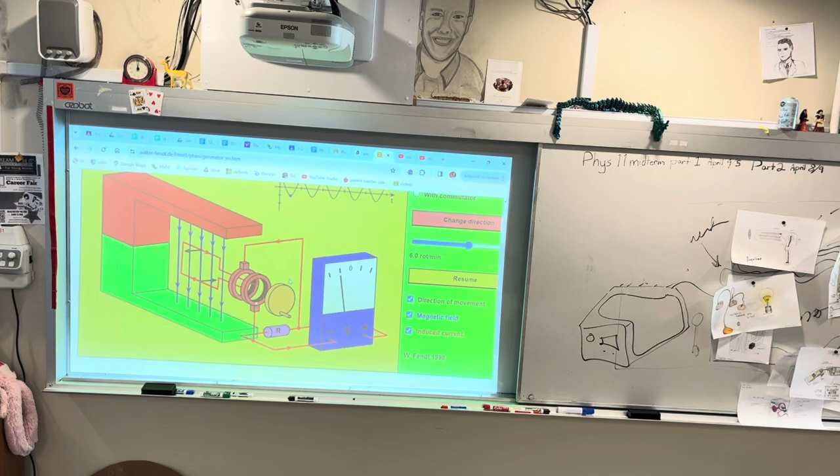This is a demo. If you want to look at it yourself on your device, there's a guy by the name of Walter Fendt. I've never met him, but I'm very thankful to him because he makes some great animations, and he made this one.

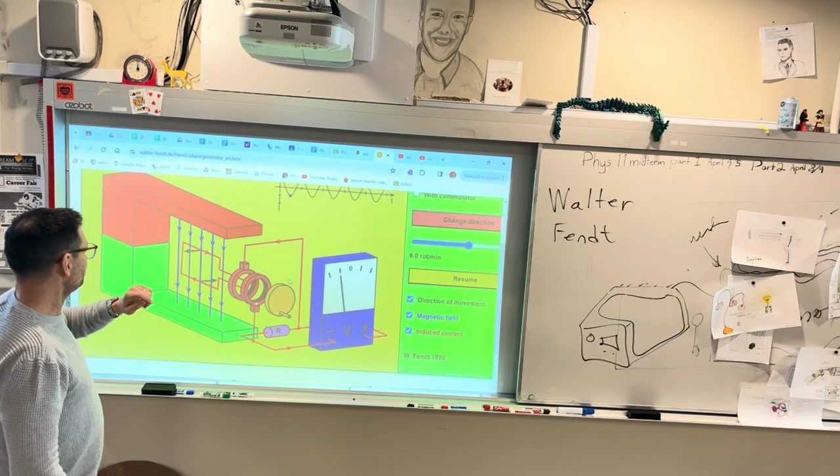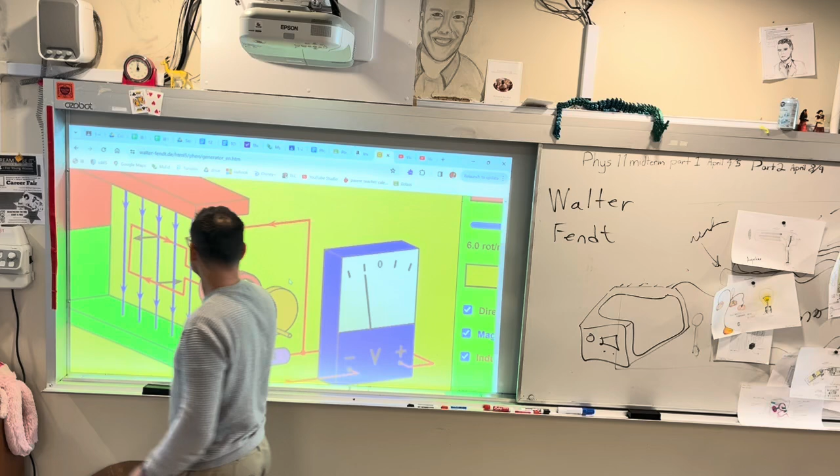So this is a magnet. The blue lines are the magnetic field. So which is north, top or bottom? The top is the north. So this is N, and this is south down here.

By the way, think of the Earth. If the Earth was a magnet, which side would be the North Pole? Actually, the South Pole is a North Pole.

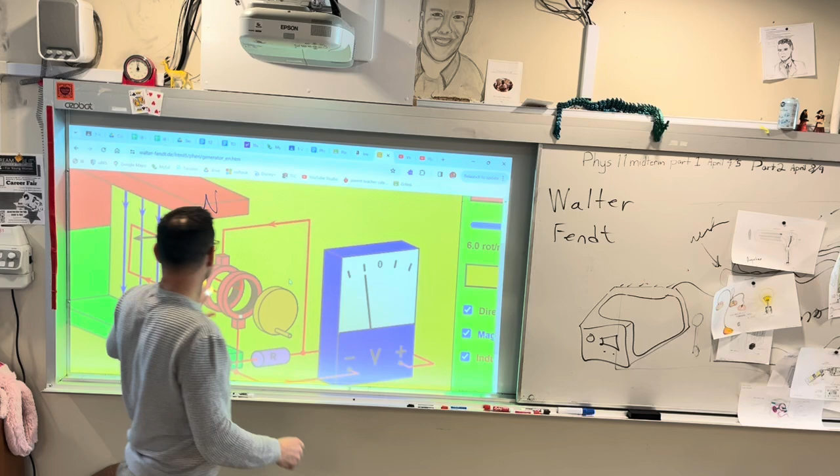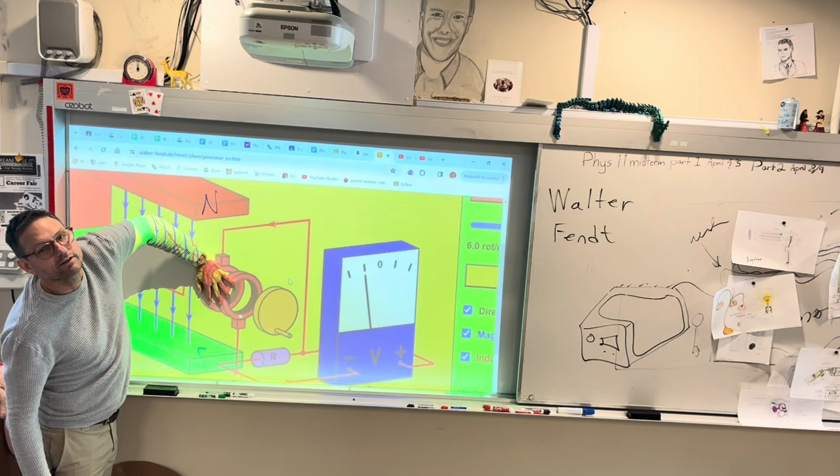So think about this. If I put a compass right here, which way would it point? Your compass points because it's north, right? So north is attracted to south. So if you had a compass, it would point to the South Pole because north is attracted to south, and south is attracted to north, so this would be south and north.

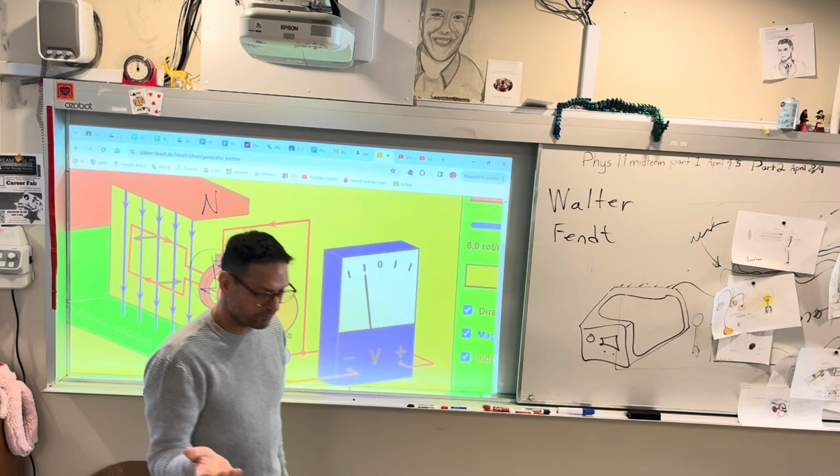If you have a compass on Earth, where does it point toward? It points to the North Pole, right? But that's because our geographic North Pole is a magnetic South Pole. So our compass points north because north is attracted to south.

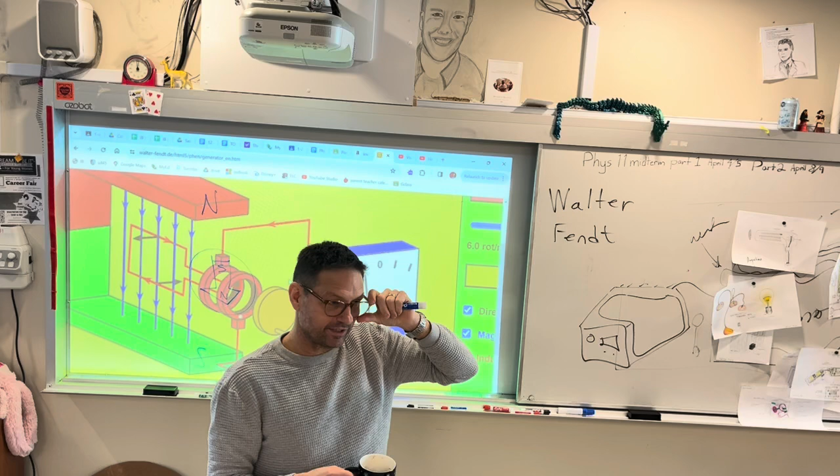So how do west and east work? We just say that if you're looking north, west is to the left. And the Earth moves to the east.

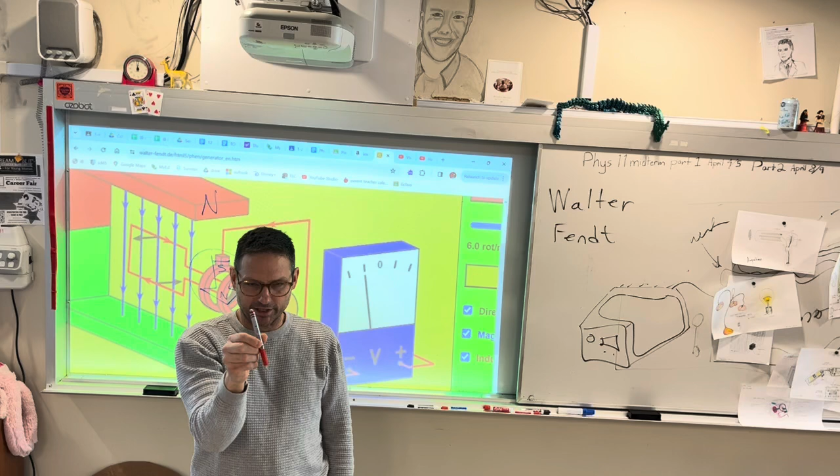By the way, did you know — hold up your pen again. Imagine this is the Earth. We'll flip it around, so this is south. Imagine this is the magnet inside the Earth. What do you think it's doing? First of all, it's tilted over, so tilt it a bit.

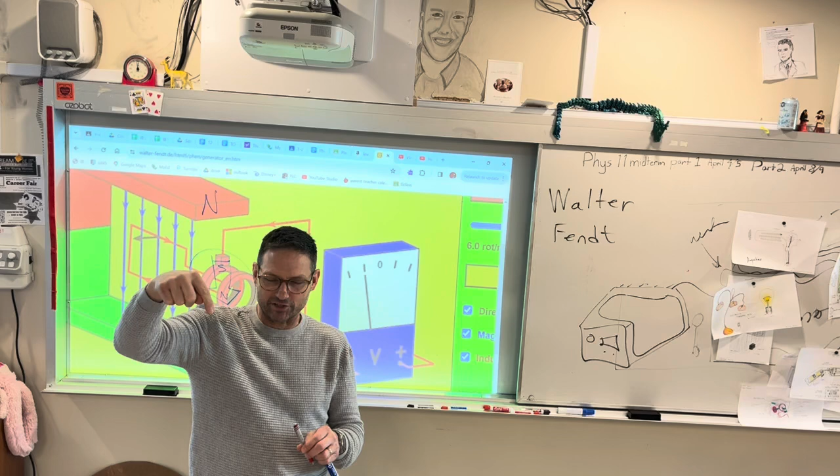And as the Earth rotates, it goes like this, so every day there's a circle. The magnetic North Pole actually moves in a little circle every day, and it's actually moving — in my lifetime it's moved a lot. The magnetic inclination used to be, I think, 21, and now it's 23 or 24.

And every 50,000 years, it flips over, upside down. Do you want to know how we know that?

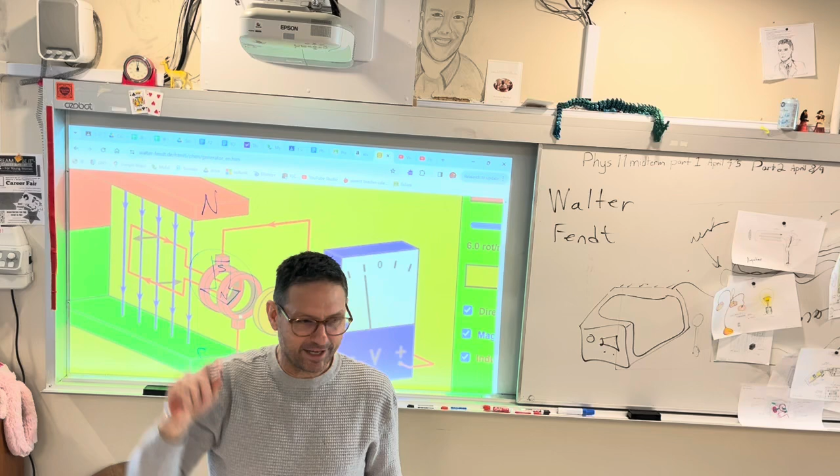Because if you go down to the ocean floor — okay, who's a geo kid? We're not here tomorrow because we're all geo kids. Oh yeah, lucky you, good to be a geo kid.

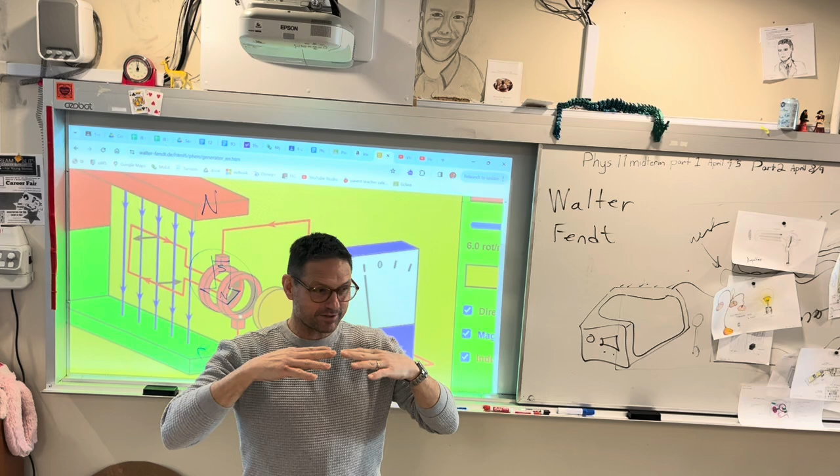If you're a geo kid, you know there are these trenches in the ocean, right? What happens in the middle trench of the ocean? The molten hot magma comes up from under the crust, and in the middle of the ocean there's this seam, like a zipper almost, and the molten hot magma comes up and solidifies in the ocean water.

I know it's bad when Colin goes like this — I've reached the limit of Colin's patience.

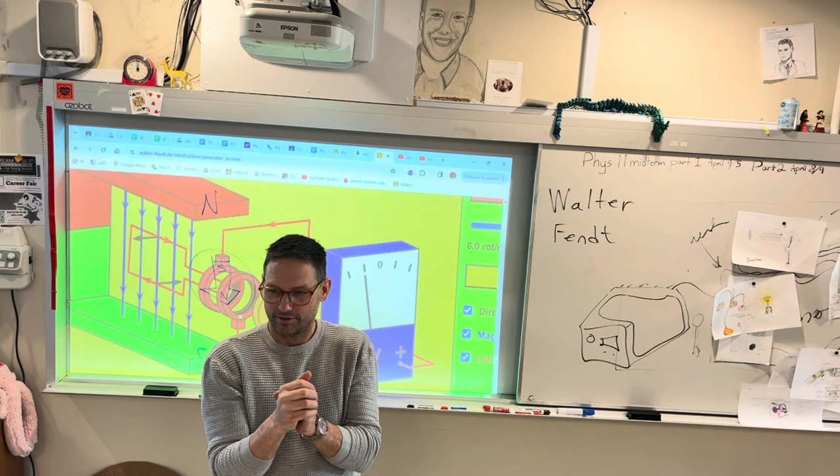The mid-ocean trench opens up and that rock comes up. Now it's liquid, right? So when it's liquid, what are all the magnetic dipoles going to do? They flip in line, and as it cools, they cool in place.

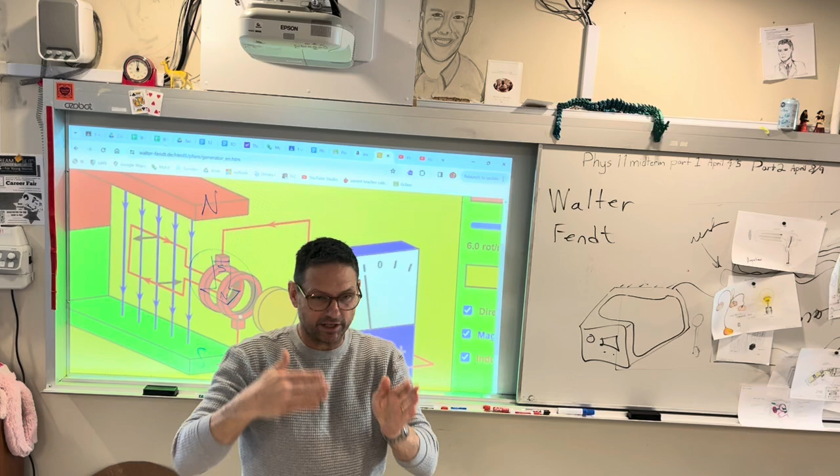Over time, if you stretch out from that mid-Atlantic ridge, everything's lined up north, and then if you get away from the trench, all of a sudden they're all pointing south. If you look at the ocean floor, there are these stripes pointing north, pointing south, pointing north, pointing south.

We age those rocks and figure it's about 50,000 years between when the magnet flips. That has nothing to do with what you need to know, though.

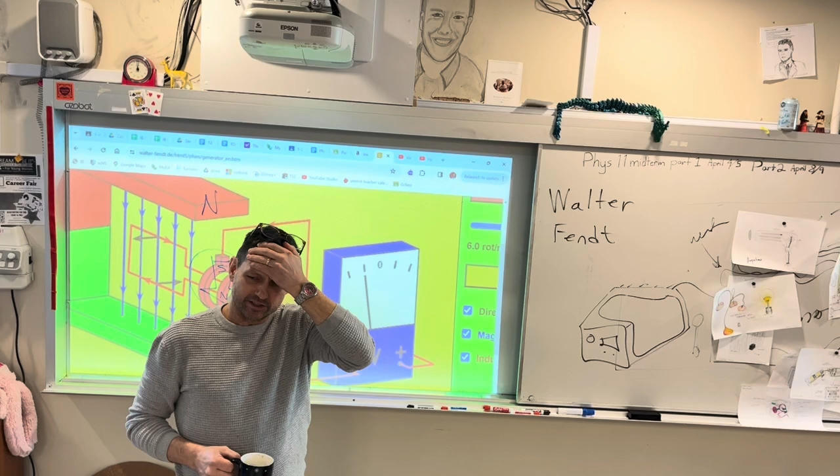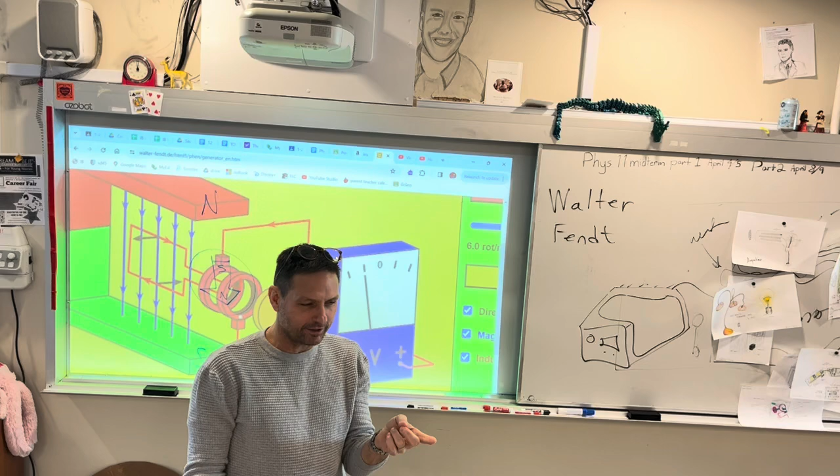While I'm going aside, here's the SpaceX question — did I tell you this already? If you ever get interviewed for SpaceX, they're gonna ask you this in the interview: if you are on the Earth, you walk south 1 kilometer, you walk west 1 kilometer, you walk north 1 kilometer — south, west, north — but you end up back at the same place.

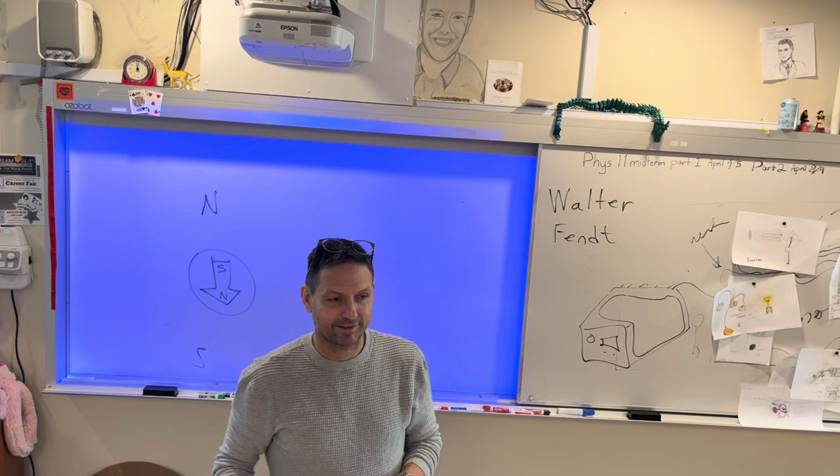North Pole is number 1. Because if you walk south, then west, then north, you're gonna end up at the North Pole, right? No, there's only one. No, there's 2. Yes, there is. Well, I thought you knew. You said you knew the answer.

Hey, we stumped Jeffrey. You got about 2 minutes to figure it out. Otherwise, you don't get the job at SpaceX.

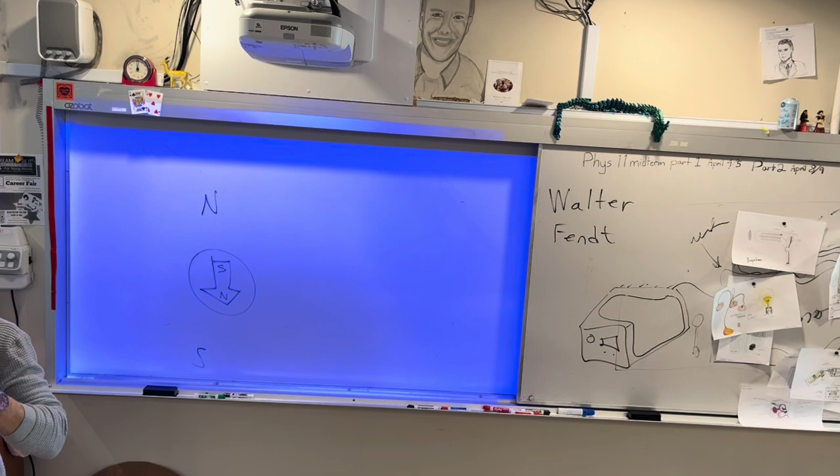Is it because the Earth's round? Isn't that what it is? It has to do with the Earth being round, yes. So that's the North Pole. But where's the other one? You can place it anywhere? No. If you do it here, you'll end up, like, over there, a kilometer away.

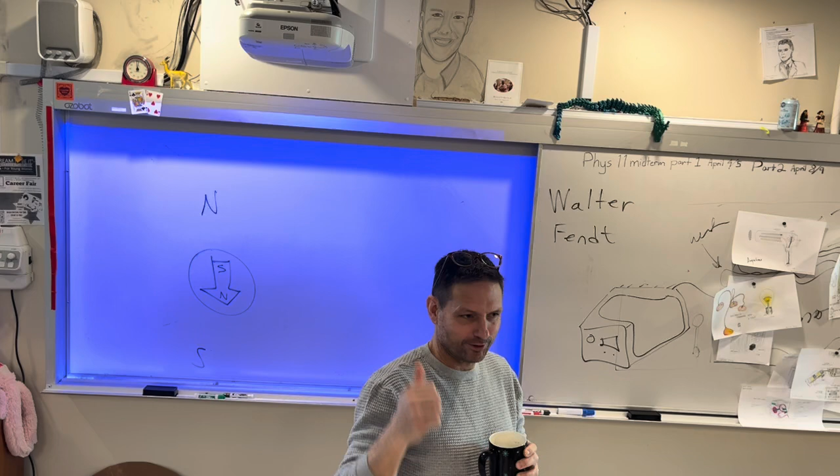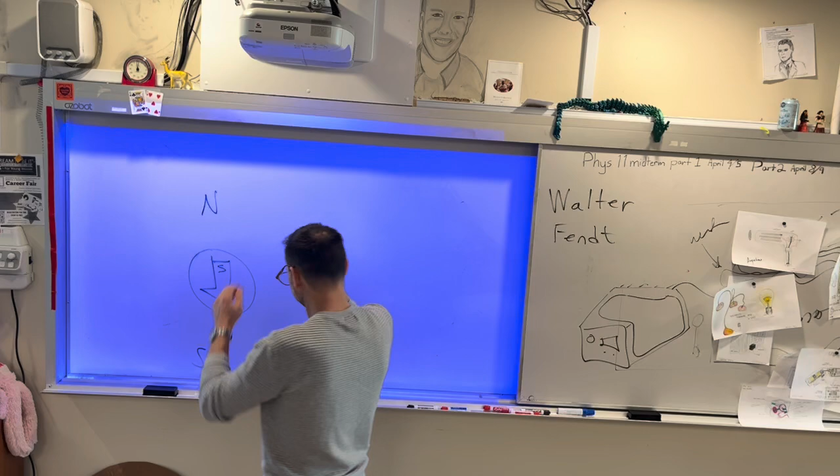Nobody knows? I will tell you. Remind me at the end, and I'll tell you the answer. No, I have to make you think for a bit. Okay, enough of that. But I will tell you the answer at the end.

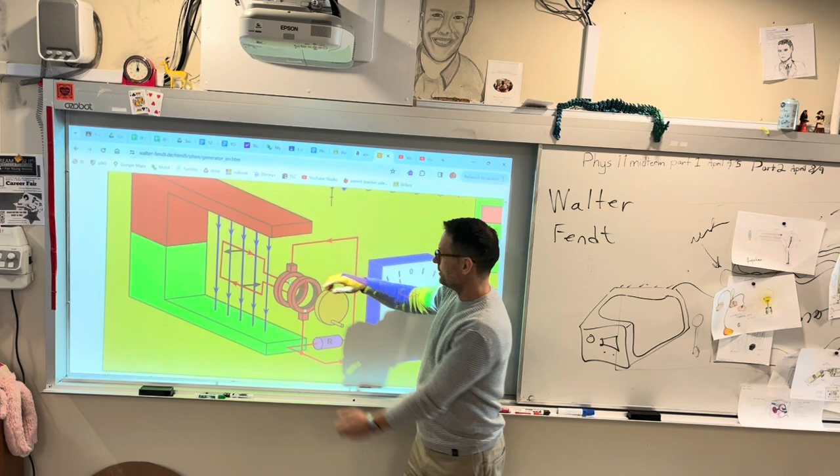Okay, this is a loop of wire. We are going to rotate that loop of wire. We're going to do what we should have done at the Physics Olympics, and we're going to hand crank it, and move this coil of wire through the magnetic field.

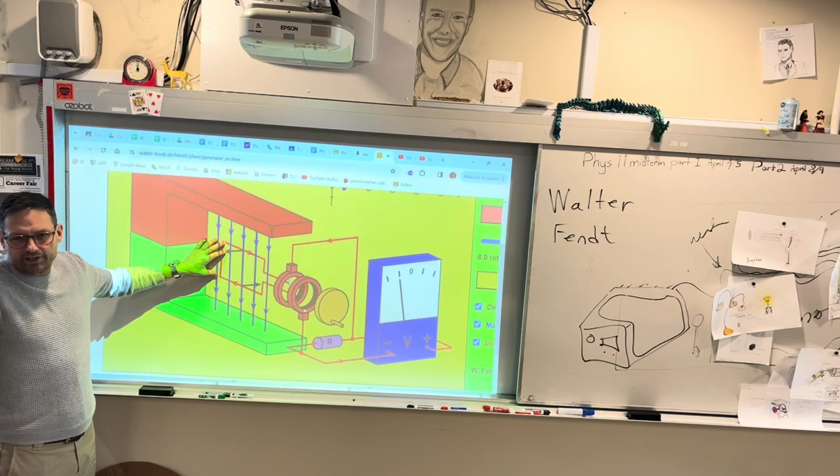So if there's no current in the wire to begin with, you just have a bunch of charge in the wire, right? You've got positive charges, you've got negative charges. And as the loop rotates, it's rotating like this. The top of the loop, this black arrow kind of shows the direction.

I'm trying to, how do I get rid of all this other doodad stuff up here? Can I press Alt? Just to happen. No. Yes. Never mind. That works on Firefox. F11. Just press right, the right key here. Like this one? So just do control right click and then disable the last one. Turn off show button. Thanks, Colin. I think if you press F11, it goes full screen. Oh yeah? I'll try it. No? Oh boy, oh boy. Oh, we're opening Teams! No! Stop it. FN F11. Oh, hey! We did it! Together we will prosper.

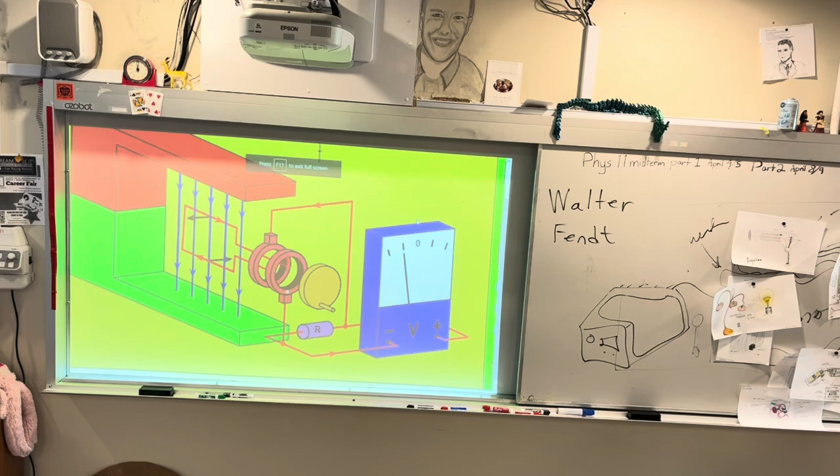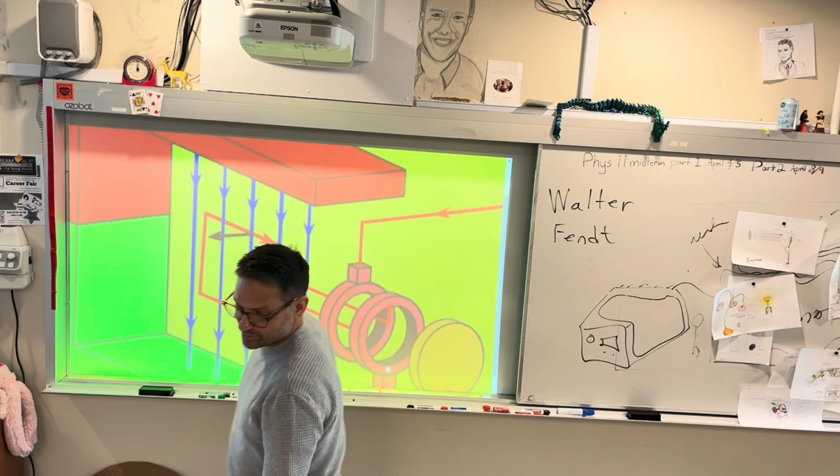How many physics kids does it take to use a computer? I couldn't even. Hey, how many hipsters does it take to change a light bulb? Is this relevant to anything? It's an obscure number, you wouldn't know it. You'll get that joke when you're older, and you have hipster friends who are just too cool for themselves.

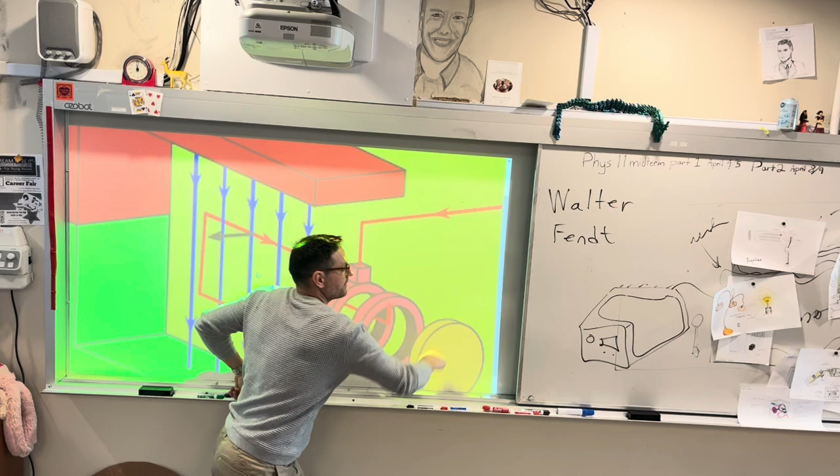Okay, this is the loop. The black arrows are the direction of the loop. So we're going to crank the crank this way. So the top of the loop is coming kind of out of the page towards us, and the bottom of the loop is going into the page, away from us.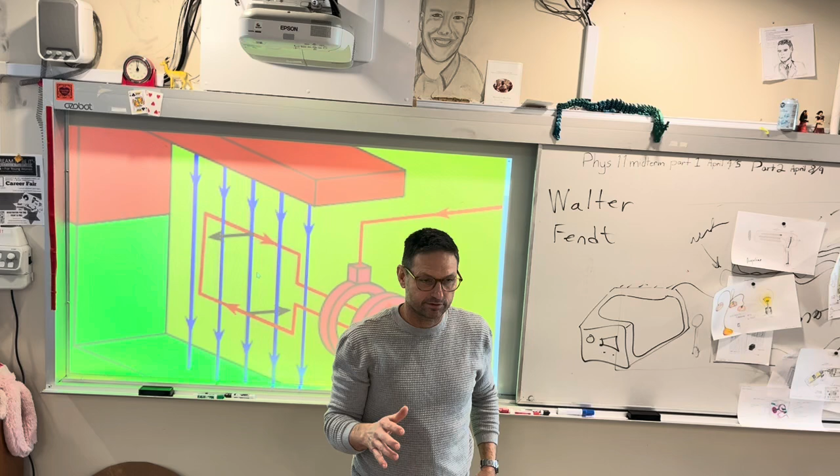Okay, so remember the first version of the right-hand rule? Yes. How do you hold your hand? Show me. Like this, right? Just right angles. What's the fingers? Field, magnetic field. What's the thumb? Current, so positive charge movement. What's this? Force. This is force.

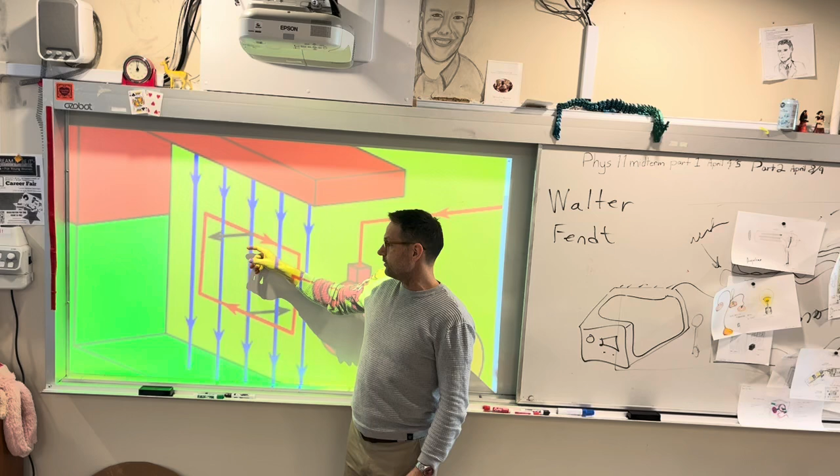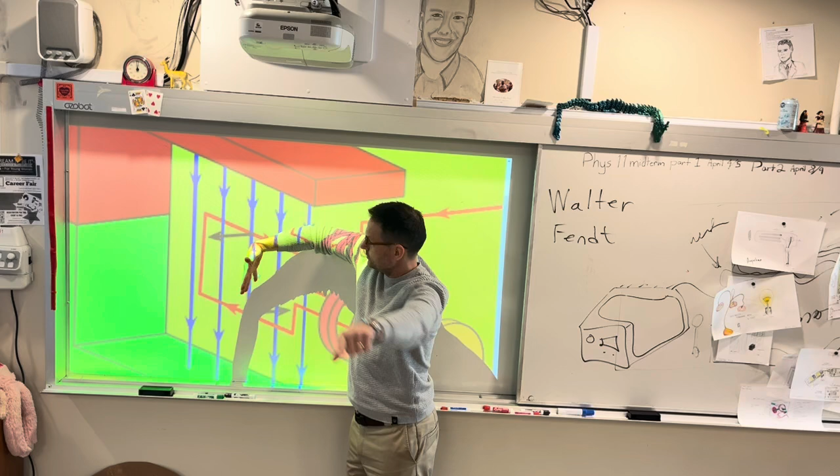Okay, so if you're moving your positive charges out of the screen and your field is down, which way will they be pushed? So our field has to be down. We're pushing our charge out of the screen, so they're going to be pushed which way? This way, right? That's why there's a red arrow here. Now, if this loop is sitting still, is that going to happen?

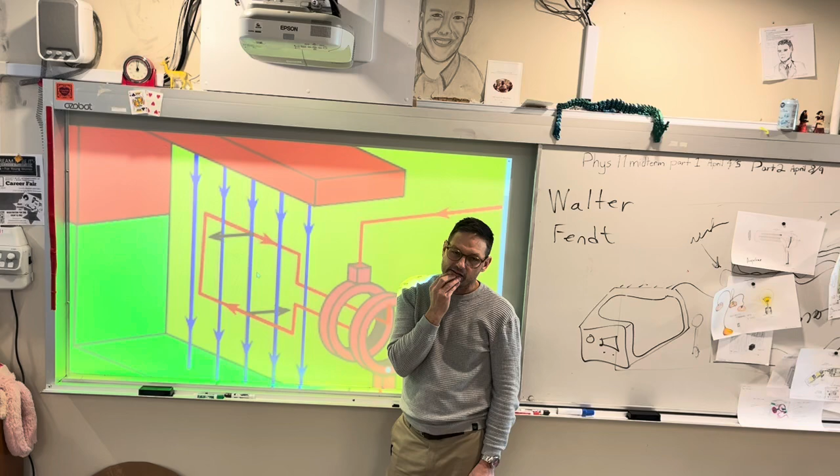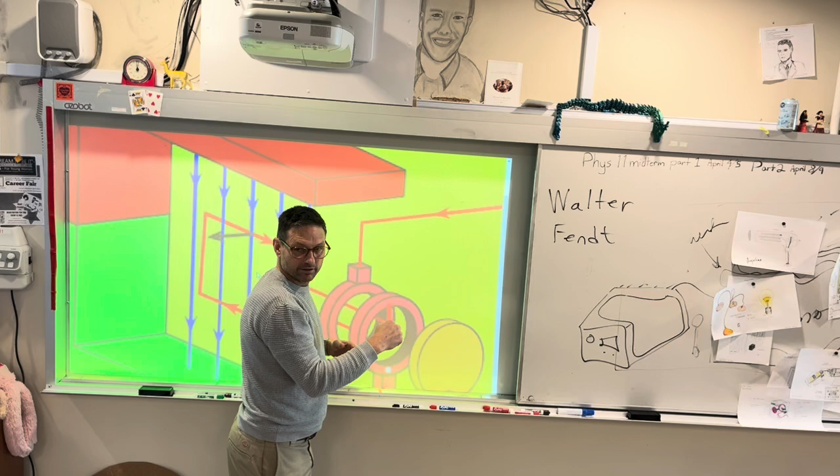No. When you turn the crank, will you feel resistance? Like, let's say I pull the magnet out and you're spinning, and then I push the magnet in. Yeah, you will feel it go, and you'll have to push against it, right? Why? Because of that force. Because you're actually pushing the current now through the loop.

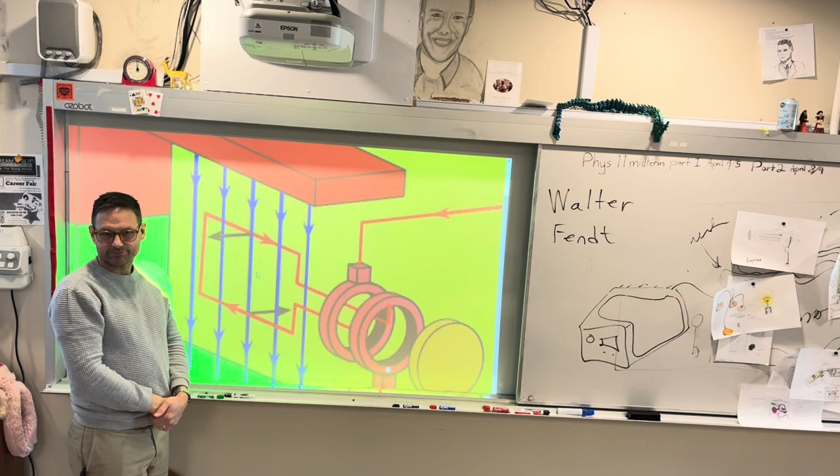Yes, Kenta. But if the force is this way, won't the coil try to go into the crank? That's HL stuff, that's induction. But we have to know. But then where's the? Yeah, we will. But if the force angle is that way, why is it moving or spinning?

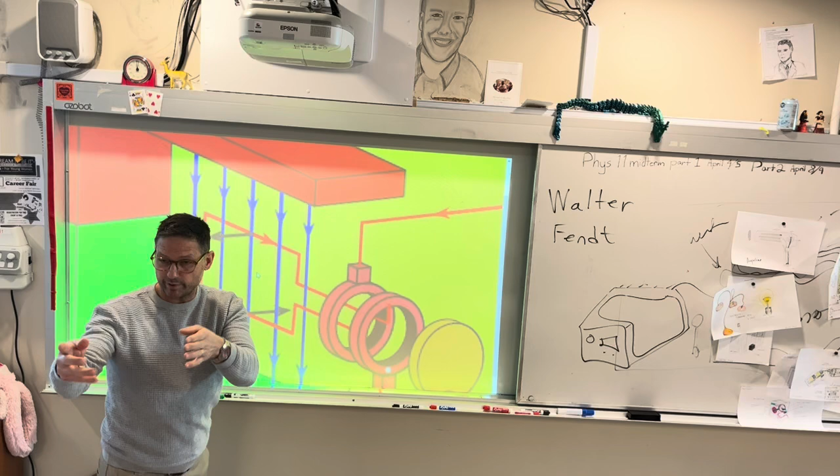Okay, say that again. If the force is going towards the crank... why is it spinning? You're spinning it, you're providing the force of spin. No, you're getting ahead, but I'll get there.

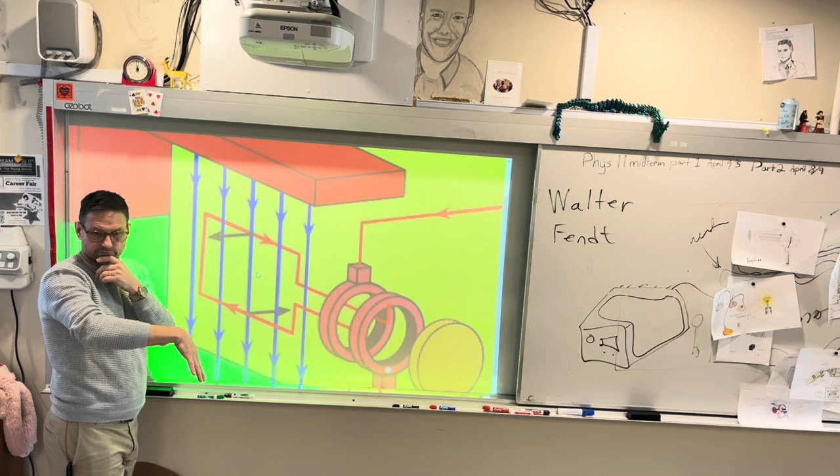So this is going to push this way. Okay, but now look at the bottom of the wire, the bottom wire in the loop, and decide which way those charges will be pushed. Fingers down, right? But the charge is now being pushed kind of into the board, so they're going to be pushed this way, right?

Wait, what? Is that current or electrons? You're right handed. Let me play it so you can see what's going on. You can only use your right hand. Yeah, for current, you can only use your right hand.

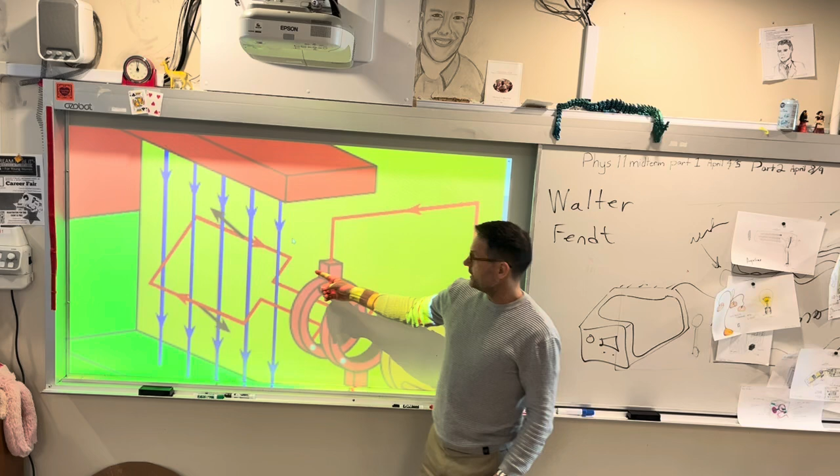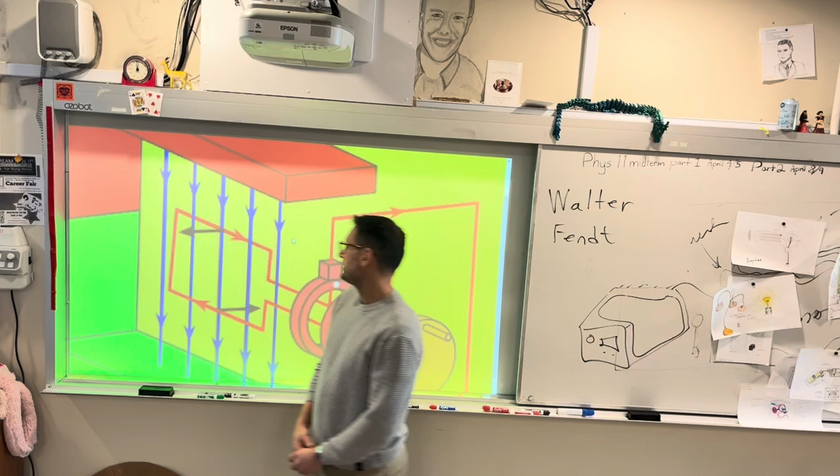This is moving, right? So notice what's happening to the direction of current in the loop, the red arrows. Every time it turns around, what happens to the direction? It swaps, right? Because your charges at the top are moving out of the screen, but at the bottom, they're moving into the screen, being pushed this way.

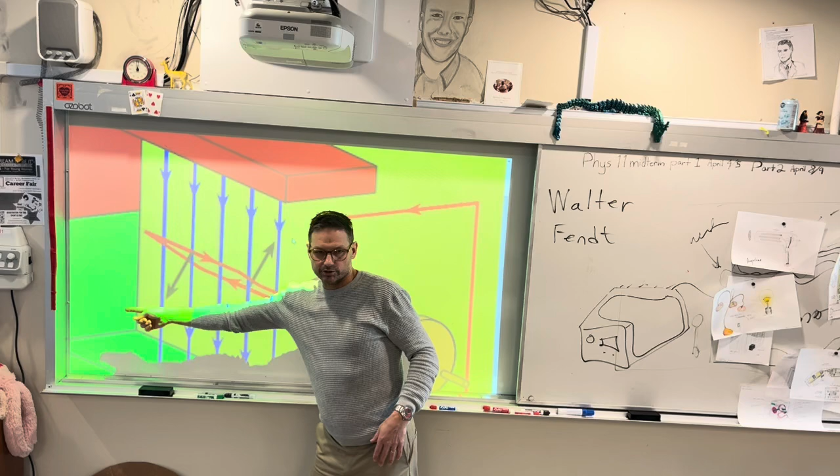So top of the screen, as this one comes up, they're moving out of the screen, being pulled this way. But at the bottom of the screen, they're being pulled in, being pushed left. So top is being pushed to the right, bottom is being pushed to the left. But that's kind of cool because we have a loop, right? So everything's gonna go in the loop this way, and then the other way.

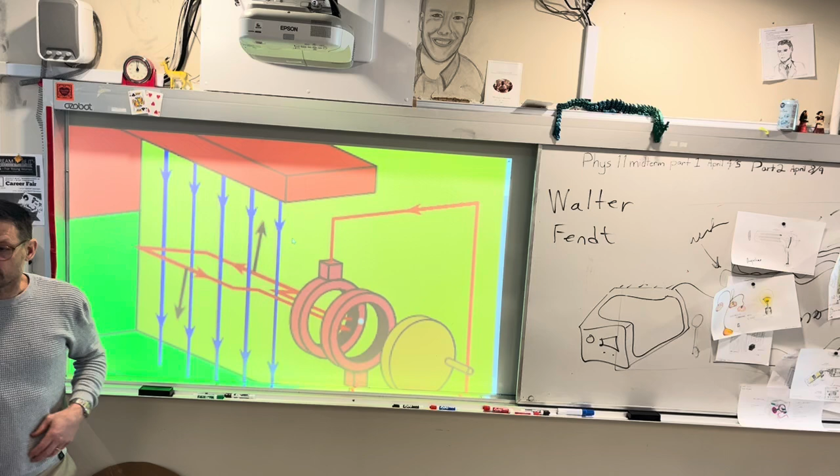Now, this was a real problem, right? In the beginning, because we wanted direct current, and this is producing what kind of current? This is producing alternating current. It pushes the current out and then pulls it back, and then pushes it forward and pulls it back. And we didn't know how to deal with that in the day.

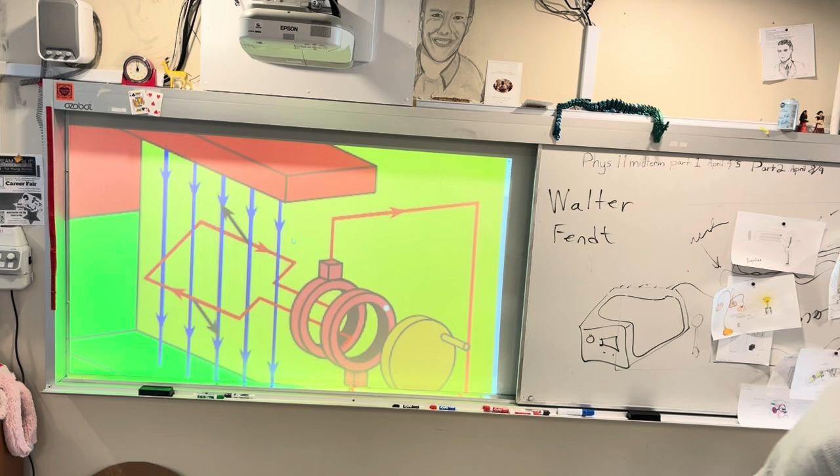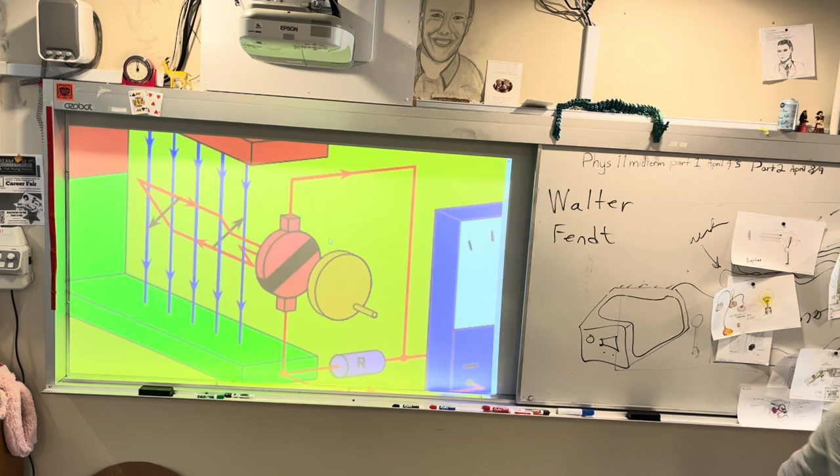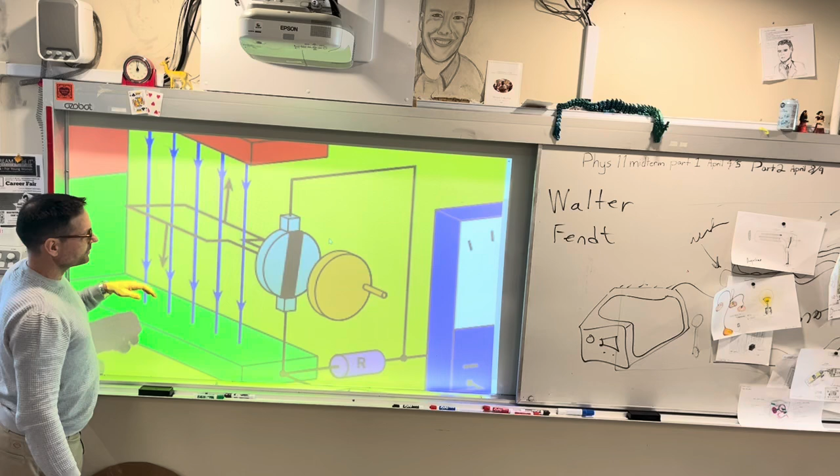So we put something on the crank called a commutator. Let me click that. What a commutator is, it's kind of a split. So the loop is in this thing here, but it attaches, these little doodads are not attached, they just slide on the commutator. And the black part is insulative, it's not conducting anything. And so as this spins around, you end up getting the same direction of current every time.

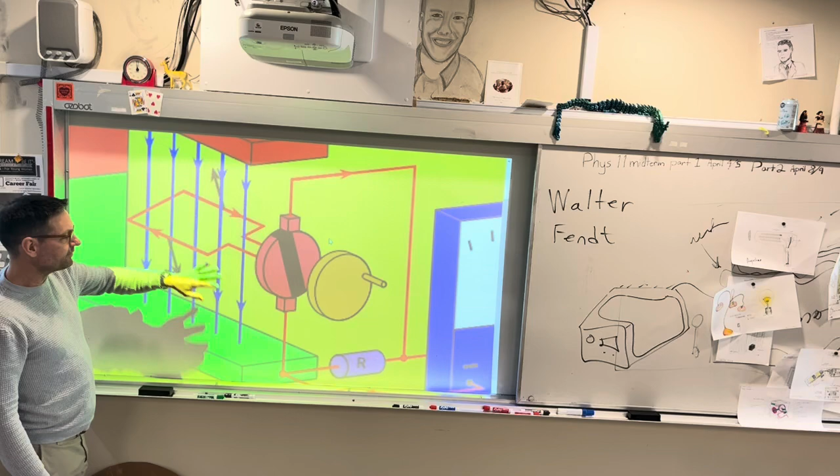This is a generator. This is how we generate electricity. If you have no commutator, you're gonna get alternating current. If you do have a commutator, you're gonna get direct current. But it's kind of gonna go from 0 up and then back to 0 and up and back to 0. Any way you know of to smooth out that bump?

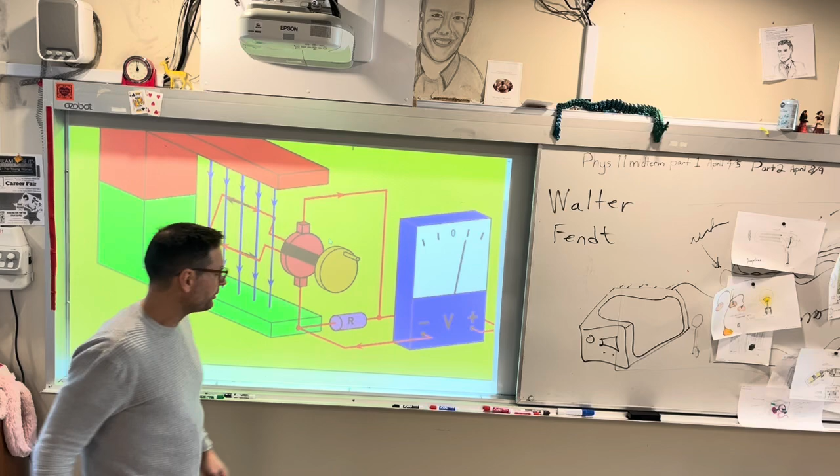Jeffrey? If you put a capacitor in there, it will store the charge for a bit and then release it in the circuit, and store it and release it, and store it and release it. Like that championship team did with their solar powered car.

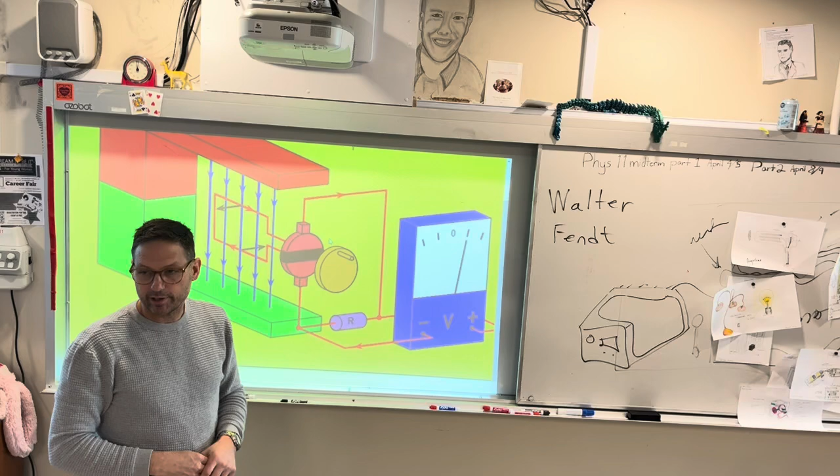We should have done it too.

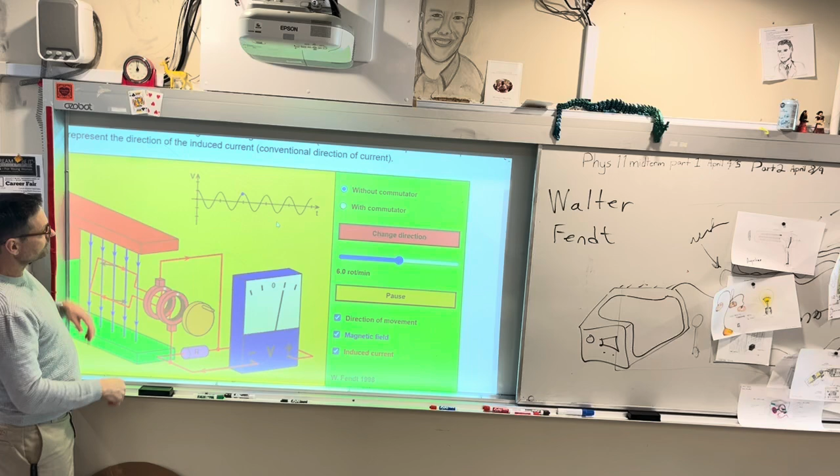Let me just pause it here for a second. I'll take the commutator out. So just have a look at the wave at the top, you can see that little dot. I encourage you to play with this on your own and try to explain it to yourself or to someone else. Watch this blue dot as it goes, and you can see the current in the loop forming and leaving. Right here at the line, what is the current in the loop? 0. You're not getting anything, right?

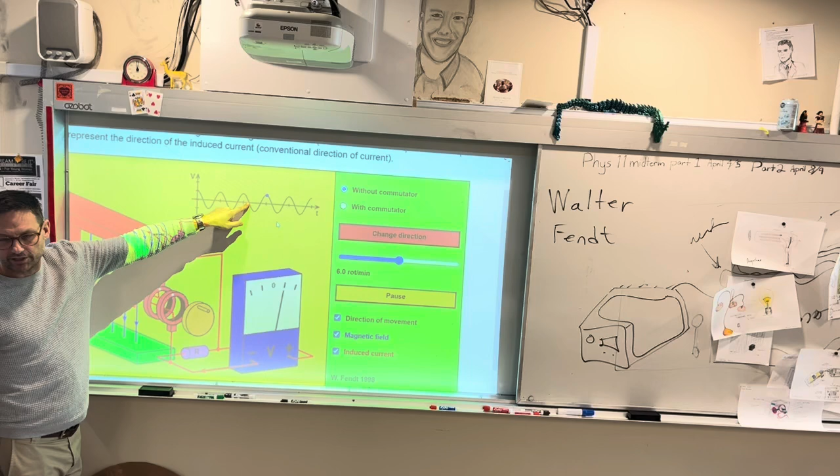Okay, now switch this around. Oops. I know, I'm sorry I'm boring you. It's like the class before spring break.

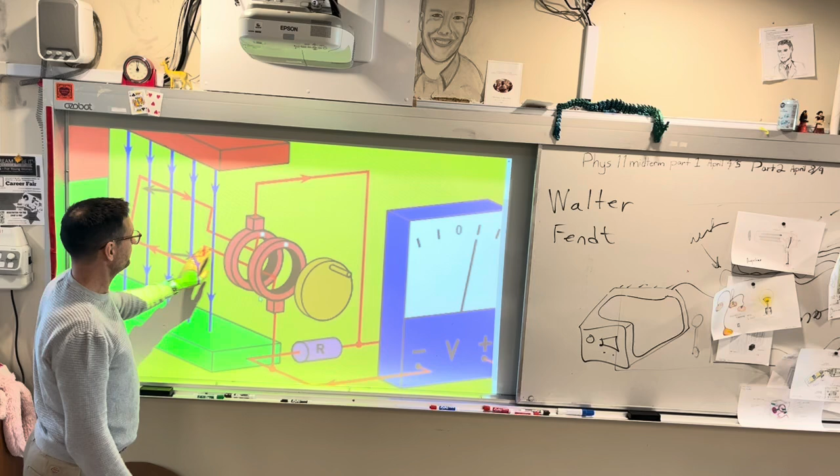Imagine now that this is no longer a generator. Instead of hand cranking, we're like, I don't want to crank it anymore, just plug it in. Let's say we put current into the loop. We don't want to spin it anymore, we just supply electricity. What's going to happen to the loop if we supply the electricity?

It's going to spin. That's right. Turn to the person beside you and explain to them why, if we put current through the loop, it will spin.

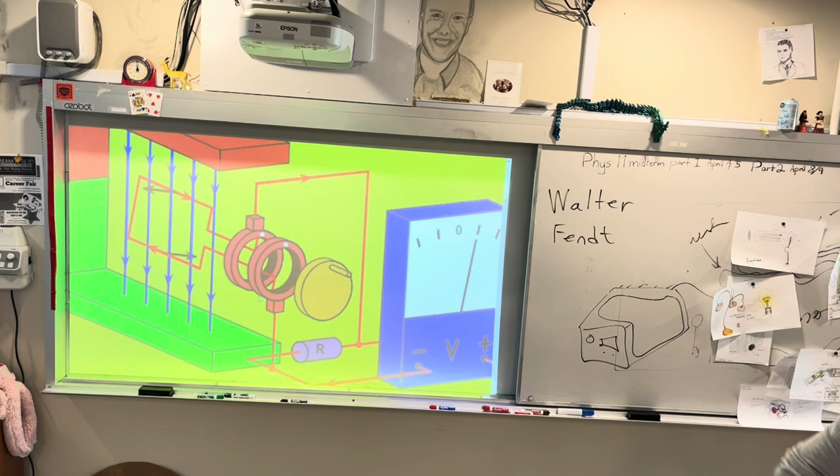Anika, you explain it to him.

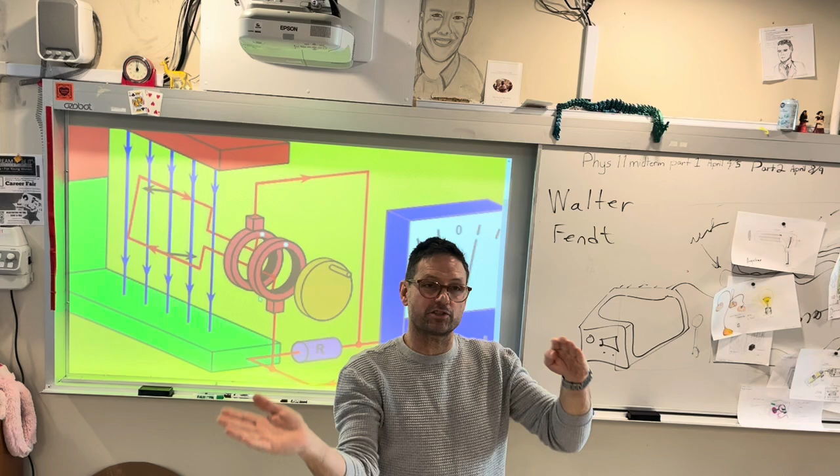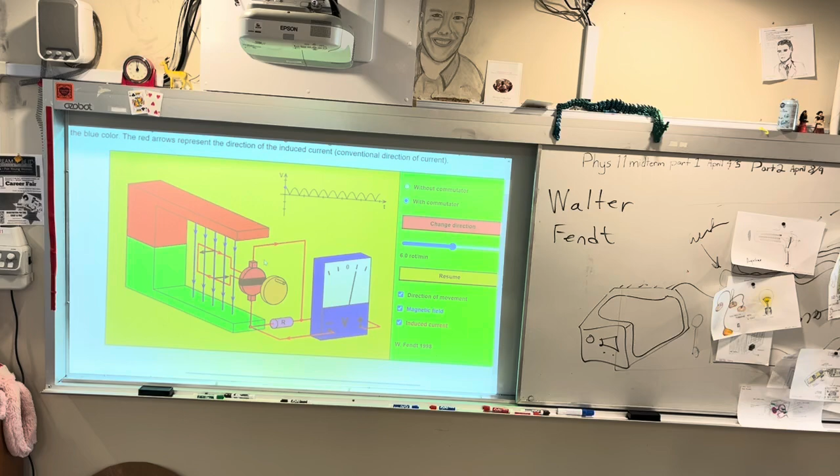Let's put the commutator in. That is such a...

Okay, everybody stop. If you put current in... Oh, just when I close the door. Can someone let Allison in?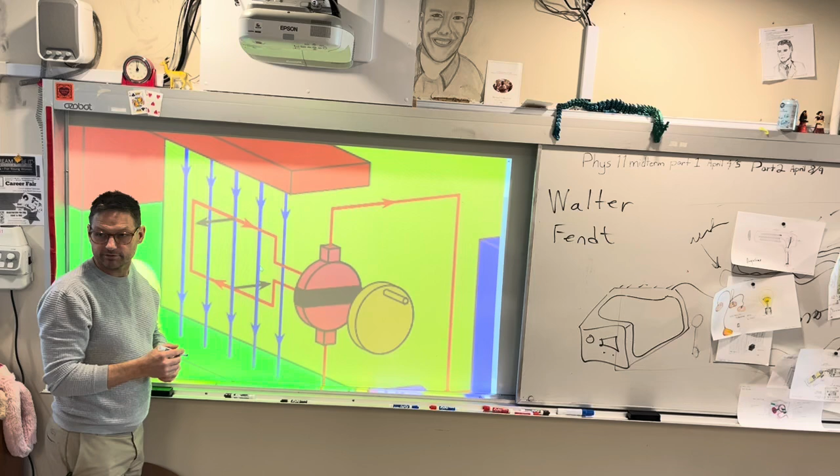The loop is sitting still, okay? And you just go, I put current in. So I plug it into some power source. And we have a plus here and a minus here, and our current is going around the loop like that. Show me with your hand what's going to push this bottom bar of the loop.

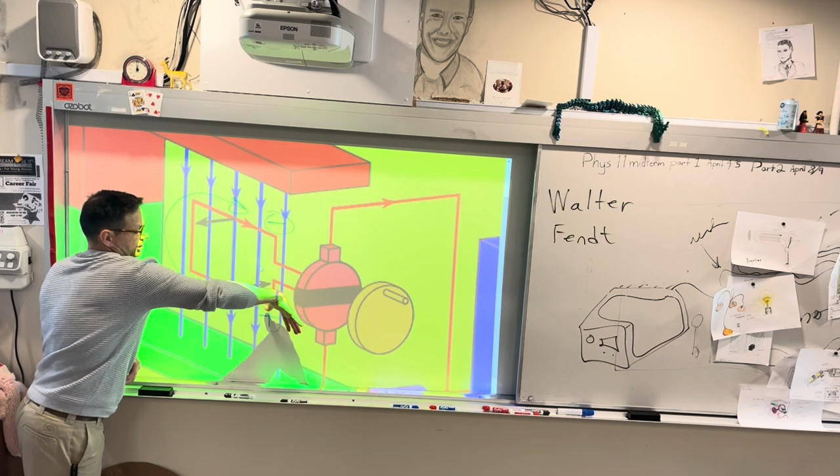So you're in a field downwards, right? But now you're pushing current this way, right? So which way is this piece of the loop going to go? Yeah, it's going to be pushed out towards us, right? So as Luke says, it'll spin like that, right?

What about the top? Which way is the top going to be pushed? The current's going to be going this way, so it's going to be pushed into the board, right? So at the bottom, we're pushing the current this way, it's going to be pulled out, and at the top, we're pushing the current that way, it's going to be pushed into the board.

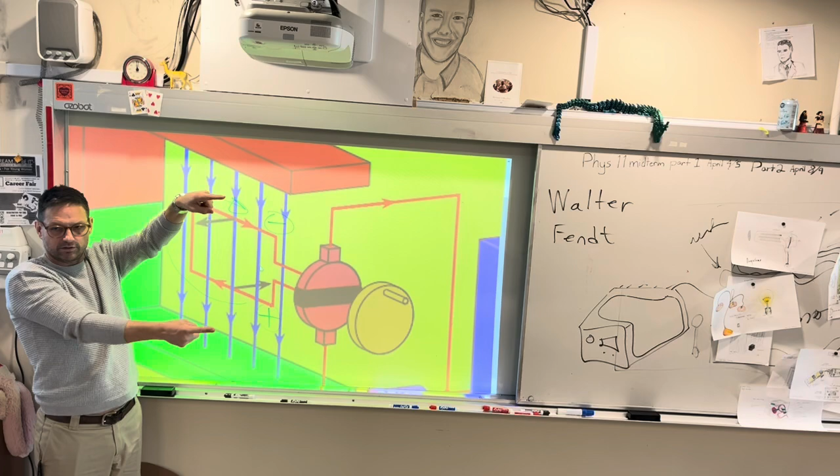And so what's going to happen to the loop? Put your fingers like this. Which way is it going to go? And it's going to start spinning, right? This is a motor. That's how motors work.

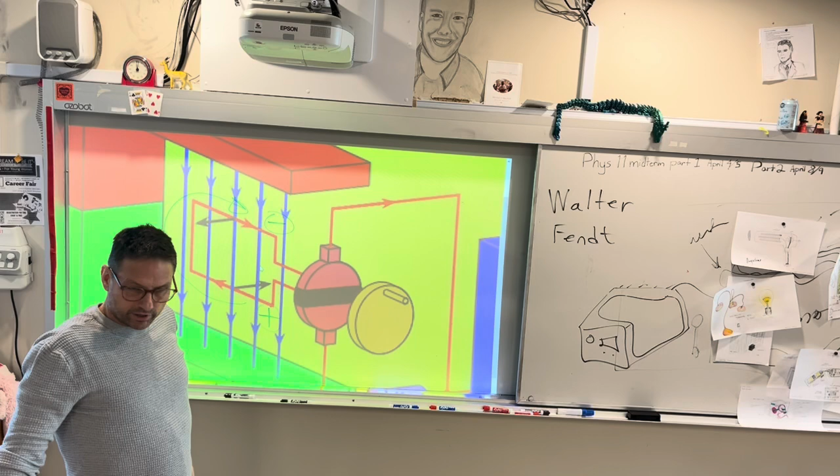Does the amount of current affect how fast it spins? Yes. More current, more force, faster spin. Can we shut the door?

I told you about Michael Faraday, yes? Remember that story? He gets whacked. Michael Faraday had the idea of fields, and he was kind of ridiculed. People thought he was crazy. And then Maxwell did some equations and said, oh snap, these fields are mathematically possible.

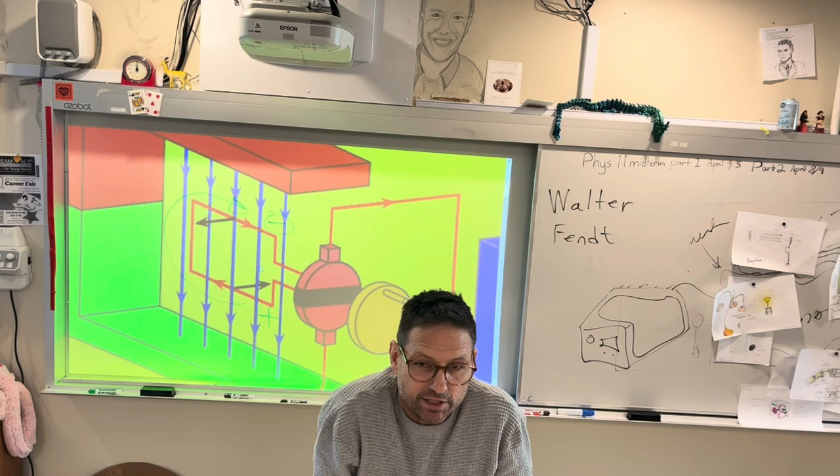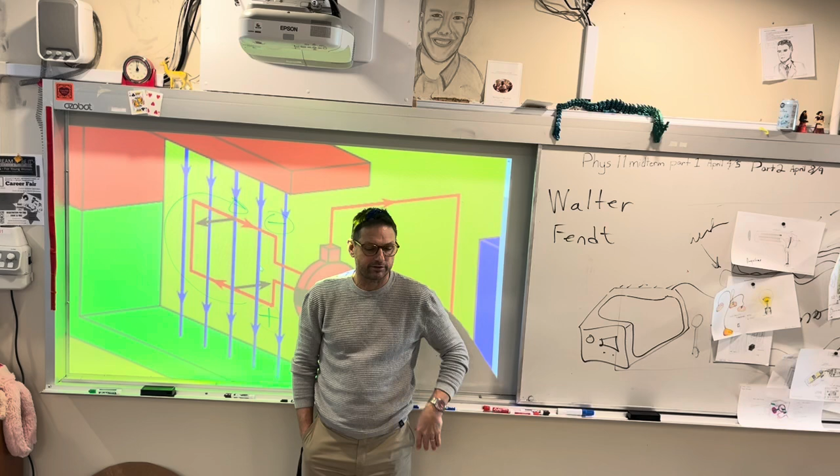And Faraday had a problem. He knew. So there was this guy by the name of Ørsted, a Danish guy. And he was giving a lecture on electricity and on magnetism. And he had some compasses on his table, and he had some electrical equipment, and he had a wire.

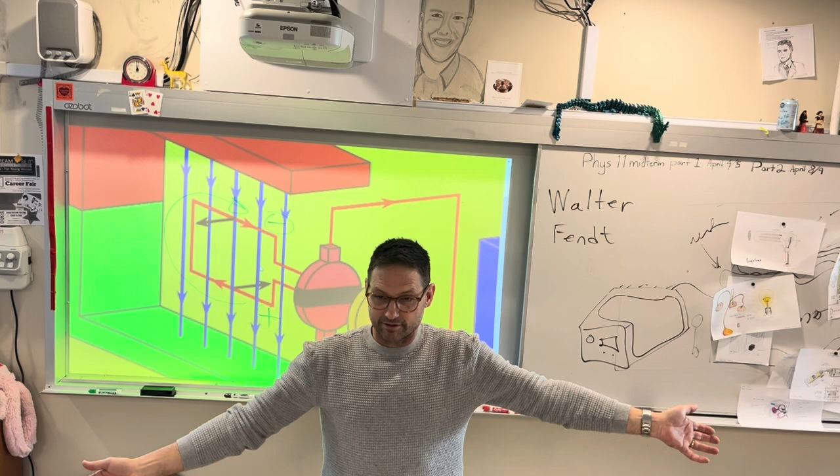What? Say that again? Wait, really fast. He had a wire with current going through it, and he passed it over the compass. And just by accident, he noticed, oh, what? It's moving. And he was like, electricity and magnetism, they're connected. WTF. And everybody thought, wow, that's crazy esoteric.

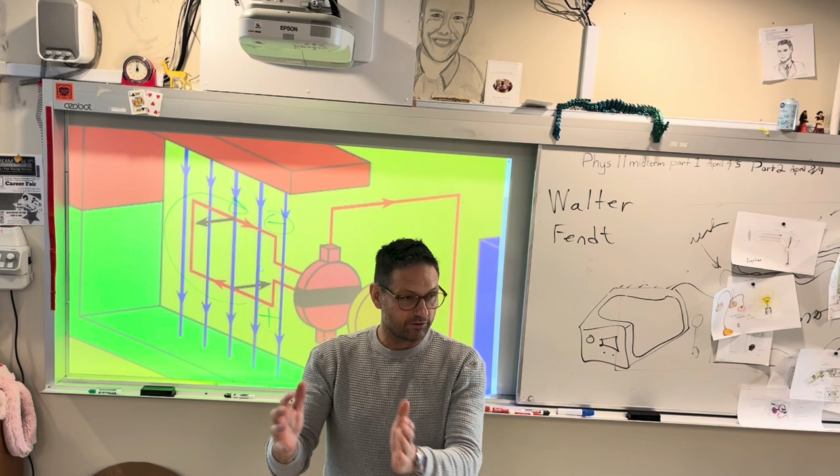Michael Faraday heard this, and he was like, oh, the world will never be the same again. This is how we get motion out of electricity. He worked on it for a long time, and he got a rod in a pool of mercury to spin. And he was like, boom, we did it.

And he showed everybody, and they were like, meh. And then he was like, we can make this move. And he developed the very first motor. It looked kind of like what those ones that Luke was working on that I have with the two-bar magnets, but you can make it spin.

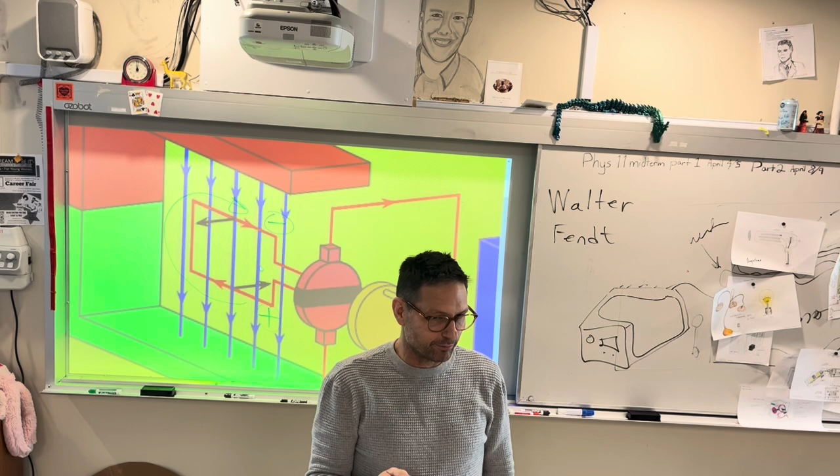Very, very likely you have never lived a day in your life without using that concept. You have used it today for sure. So, lots of big effect.

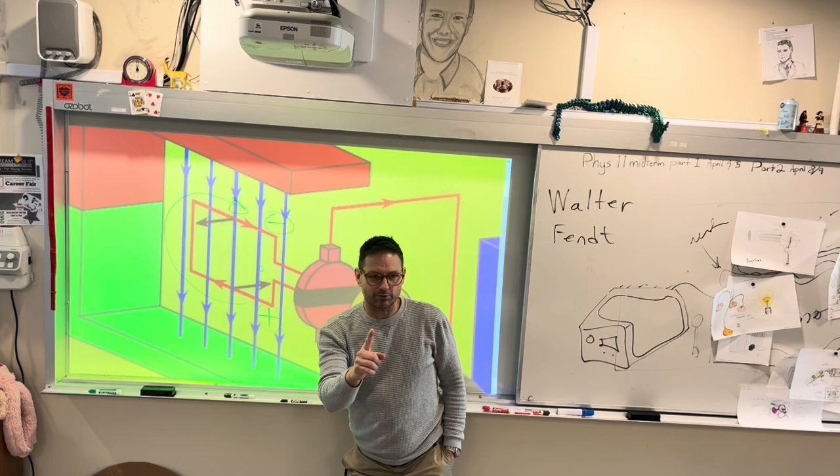One last question to leave you with. The interview question. If I'm putting current in through the loop and the loop moves, then we have a moving loop, right? Which is going to do what? It's going to induce current in the loop. In the same direction or opposite direction? Opposite direction. That's called induction, and we'll learn that in the HL a little bit more.

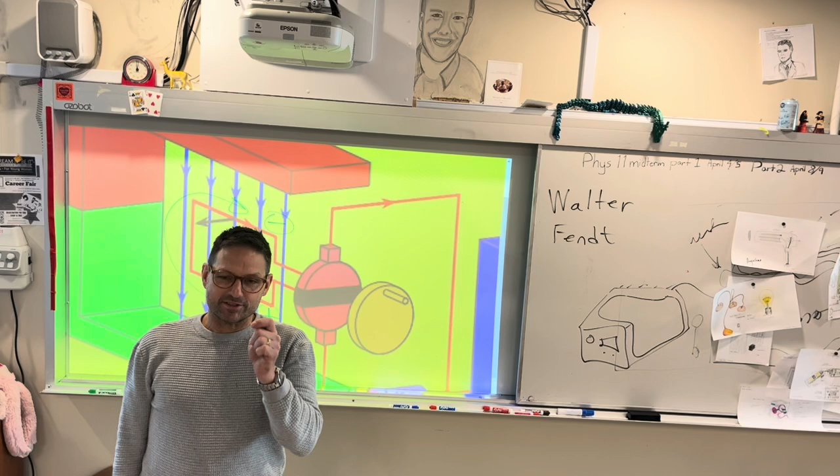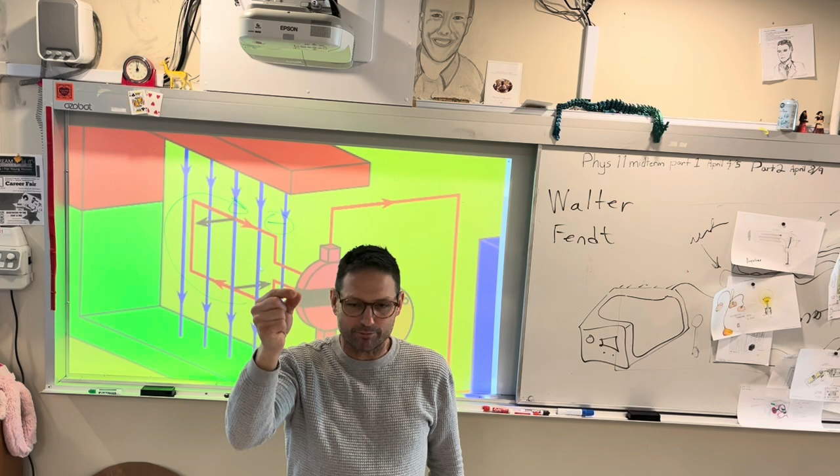The last one, should I tell you the answer? Yes. Please tell me. If you start at the South Pole and walk out to a point where the circumference around the pole is 1 kilometer, and you go 1 kilometer up, you can go down, walk the circumference in the western direction, and walk back up. And that'll get you your job at SpaceX. Have a great day, everybody.